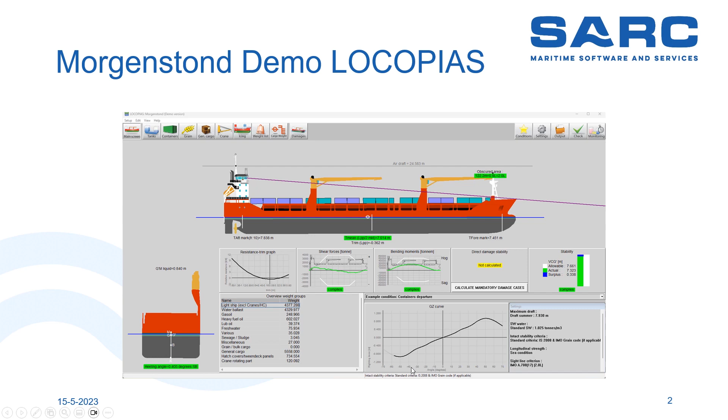So we will switch to the demo version we use the most. It's the Morgenstond vessel.

It's available for all demonstration. Also, if you need to show something to your clients, etc., we have it available for everyone. And also, if you like to test new features, just give us a call, and we have these available for download.

I will go over all the modules and the new features in this LOCOPIAS version, and then at the end I have some other features that are not available in this LOCOPIAS version. But I will firstly go through all the modules in this LOCOPIAS, and I will start with all the loading tools that you see on the top of the screen. Then at the end there are some tricks and features in the main screen, and output, etc.

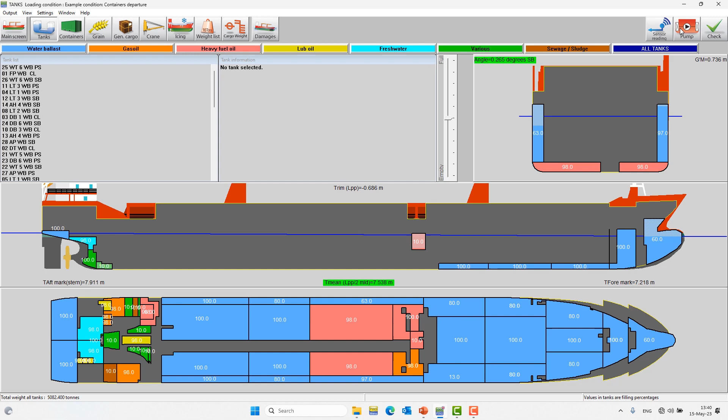So first we have the tank module. It's quite straightforward, mostly. One thing that is quite a topic these days is more interfacing with other packages, and here's a sensor reading button, and it can read data from all other kinds of systems. It's really nice to have that you, as a user, don't have to type all data and have mismatches, etc.

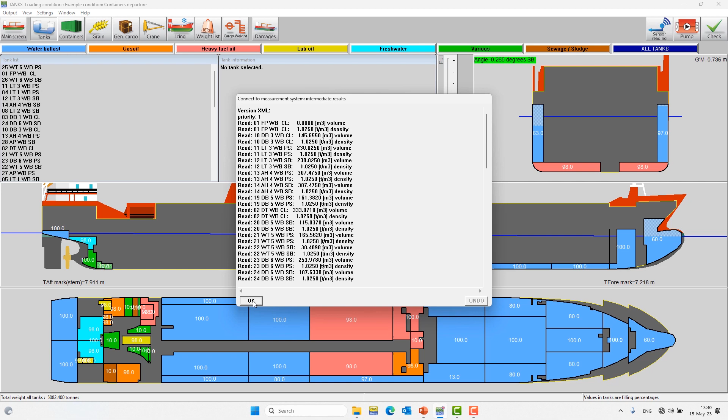So that's quite simple. Big development last year is the new container module. It's completely redesigned from scratch. As Herbert already told, it's a really new way of thinking. Before, we defined the slots where the container could be positioned, and that was really fixed. Now we define the castings on the deck or on the tank top, and the program derives. Perfect.

It's a bit aesthetical. So now the program automatically calculates where the container can be positioned. It checks the geometry, also if a container is extra wide or extra high or longer than standard. It will do all the checks for you, and then it basically has no limits.

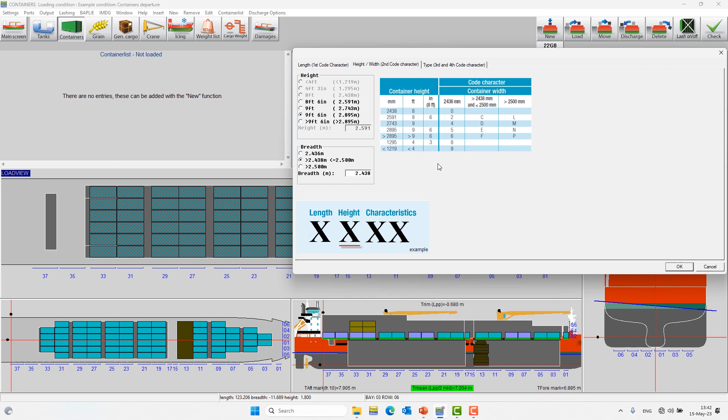You can select any type of container, any length, for example 41 feet, high cube, and then for example extra wide. When I want to load a new container, I'm now below deck, as you can see with the red crosshairs. When I go above deck, you see the yellow positions are available, and I can load some containers here.

I could even say I want to place containers freely. For example, for inland ships, they don't have castings on the deck, so you can just put them anywhere where there are no obstructions. So yeah, this makes it really flexible, and we have some clients, especially we work with A2B, who still have all the weird shapes and containers. Now the program can do anything that is available.

Within the container module, there are some extra tools. First thing I like to mention is the IMDG - so it's the code on dangerous goods, and the software can check if the containers with dangerous goods are separated from each other with the required distance. I already prepared an example, so I will check.

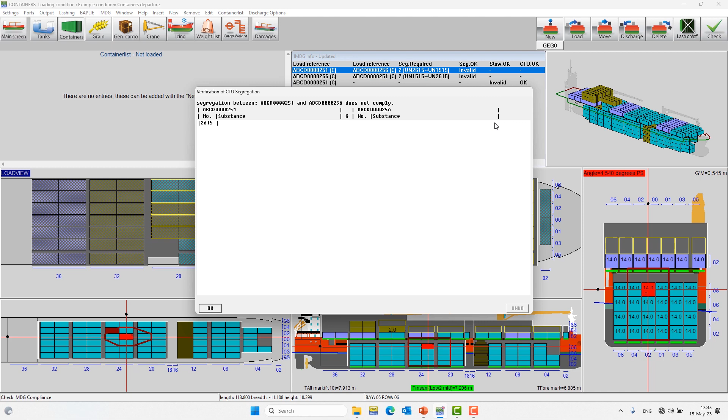And it can be a long list, of course, with all kinds of checks and extra messages. In this case, there are no special messages, but sometimes there is even information that the software can't check, and then the user can read the message. So he would still need to go through the list to see if all is okay, but most will be checked by the software itself.

And then on the area that is forbidden, you see already here that the forward part is a bit shorter than the aft part. I would like to go to my presentation to show how that works.

So in the dangerous IMDG, you have a container, the orange one. It contains the substance, and then there's a standard distance of one 20-feet container forward, aft, and to the sides. And then you check if there are containers inside that area, because if, for example, the container catches fire, then the containers in that area are affected almost immediately.

So, for example, the green container is partially in that area, so then you have to include that container in that zone, and then you connect all the outer points like with the red shape, and that is then the final forbidden area.

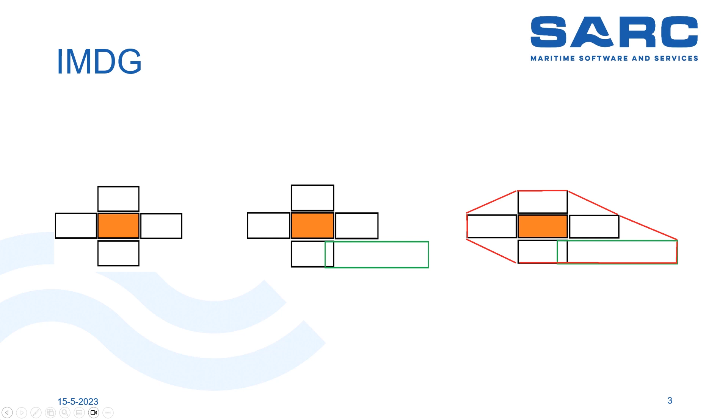Yeah, in the demo version, you can only check substances that end on 5. So you will see in my example as well, it checks 2615 against 1515. So if you want to play around, use substances that end in 5. But as is typical for us, if we pay as well, as an institute, a fee, then we can get full functionality on this demo version.

That's possible, yeah. Any other questions on IMDG? Okay, then I will continue to BAPLIE.

It has also already been explained a bit this morning. It's the industry standard for sending data to ships and to terminals, etc. But it's a bit of a crappy system, yeah, it basically says the container is in bay 12, for example.

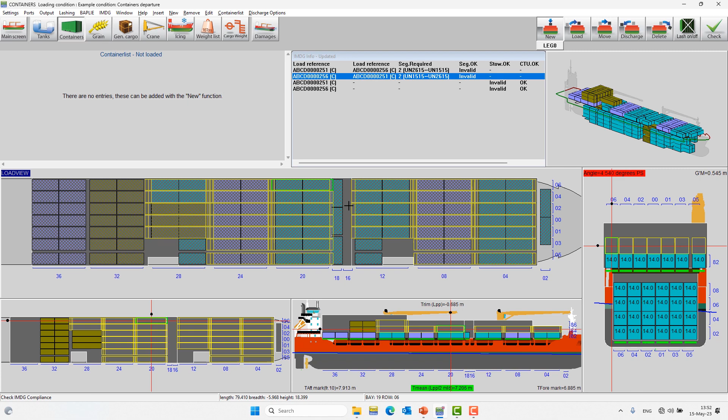But yeah, if you have, for example, a 45-feet container, I can show you. You can already see the option, like the container can have its end sticking out on one side if it's positioned on a 40-feet bay, or on two sides, or on the other side. So it basically has three positions where it can be put in bay 12.

So BAPLIE doesn't say where it needs to be positioned. So we were in discussion with A to B again. A to B helped us a lot with this new development. They are one of the first clients, and that helps to have feedback from the users. And this is one of the issues.

Yeah, we can't help that the industry standard is a bit crappy, but finally we had a solution that the user can say, well, in bay 12 we know every time we want to have these containers sticking out to the front, and then the program knows how to position the container, because it's limited to one anyway. So yeah, we have a bit of a workaround for the BAPLIE system, same as the example in the morning.

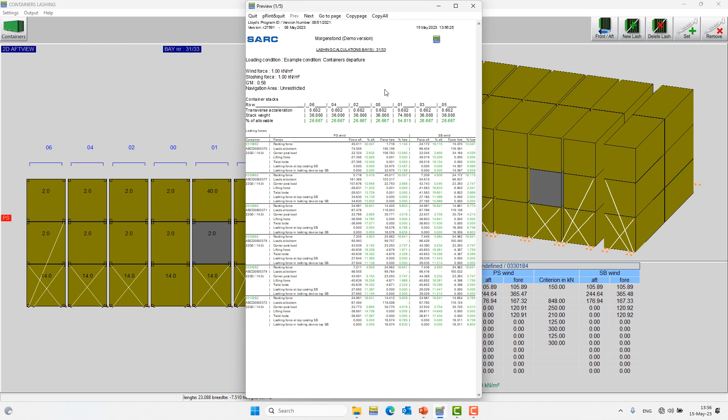If I turn this off again, I can click on the container to see all the calculated values. If I print, well, everything is green. Yeah, it's click and go, basically.

You have to manually apply the lashings in the program for each container, but you can also copy. It's not an advice, no. It's a bit of trial and error.

If the lashing does not comply, it will show either the container in red, or more specifically what part is not complying. So, non-compliant according to the forces on the container. If the lashing is approved by the lashing computer, you can use it as an alternative to your lashing plan. So if your GM is different, for example, you can sail with fewer lashings.

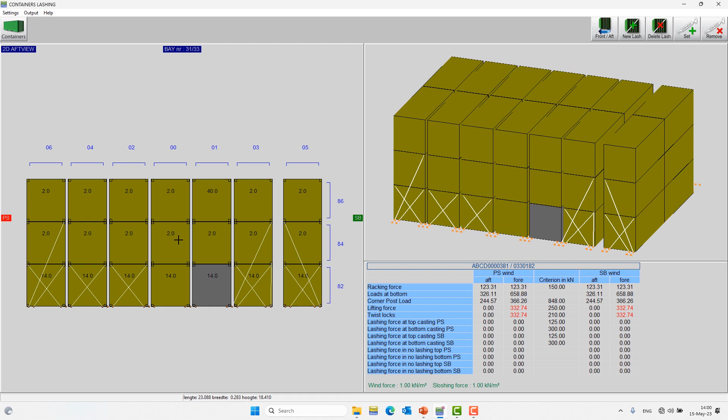Now you have 3 standard containers, but maybe in the model of the ship it's not allowed to put 3 high cubes. Is that a LOCOPIAS warning? No, for the lashings it does not matter, it will just take that stack. If you go back to the container module itself, you see here in this area how much space is defined, and this is the height that is allowed for that ship.

One additional feature that's quite useful for ship owners: you can have either route-specific lashing or weather-specific lashing. On certain routes you can apply lower accelerations, and therefore you need fewer lashings, and the same applies for weather-specific lashing. When you know you have a short trip and the weather is good, you can get an exemption. I don't know the details of how you get the lower acceleration, but you can put the acceleration into the program, and then you can use a smaller amount of lashing rods. That's when the real advantage starts compared to the lashing manual, because that's always worst case.

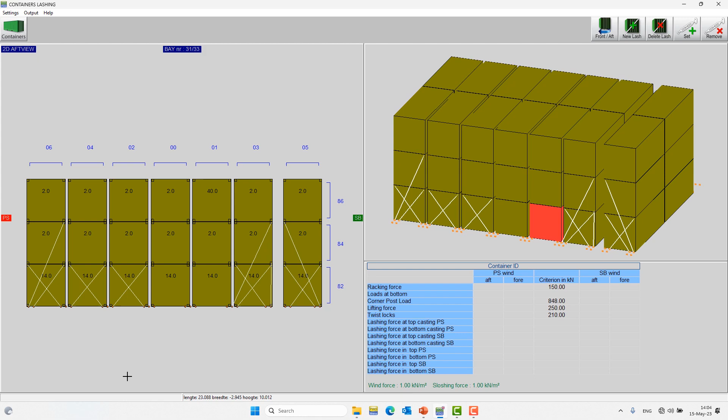Any more questions on lashing or containers in general? And I will continue.

The grain module I will skip, there's not much changed there. I'll go to the general cargo module. I will not show all details, but there's one nice feature I like to show. I'll go to a different loading condition. I want to have an empty ship.

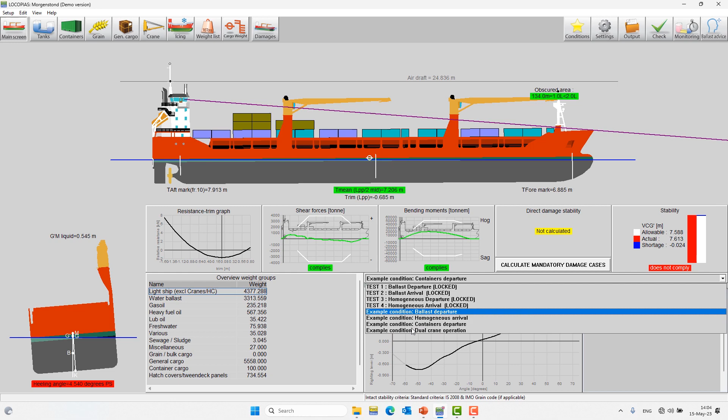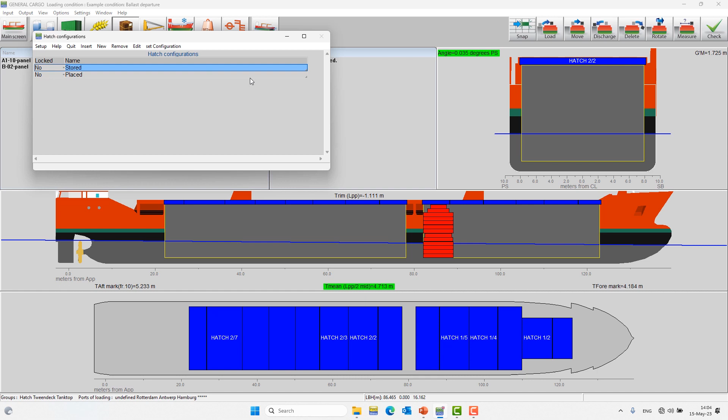You see all the hatch, the tweendeck panels in place, and before you could move them one by one. But now we have a small but handy feature where with one click you can just move all the panels. It's quite simple, but it works well.

You can predefine this yourself? Yeah, the user can set this. So even if it's not really a store position, but they just dump them somewhere in the hold, you can set that as a position and then use it again later.

Also for a different loading condition? Yeah. For example, lately we had a vessel that did not really have a store position for the hatches. Then you can give it to the crew and they can define it themselves and work with it.

You can also manually shift them like you shift the cargo? Yeah, so normally if I take this, it will snap to the predefined positions. But if I turn off the snap, I can just move it, and there's even a predefined height, tank top. Now it's on the tank top.

You want to stack another one, can you also do that automatically, so it stacks on top of the one that's now on the tank top? No, really stacking is not part of the general cargo module.

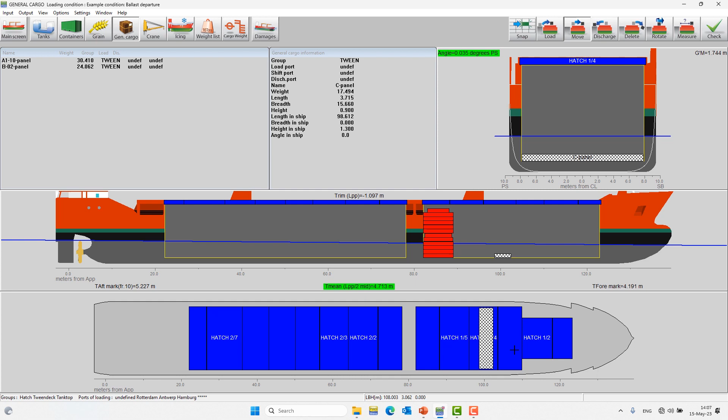The crane module, Marco already told you the definition side has been changed in PIAS. For the user, it's not really changed, it's the same module. One thing developed in the background is we use a different computation library, and it now basically has no limits to the number of elements. Before, the crane could have two moving elements, like a boom and a jib, and now it can have limitless elements.

We may need to define some more buttons in the screen to operate it, or redesign it. But if you have a weird crane, or a flying jib with more moving parts, like we see inland on cranes mounted on trucks, really folding cranes, we now have the tools available for that, so that's new.

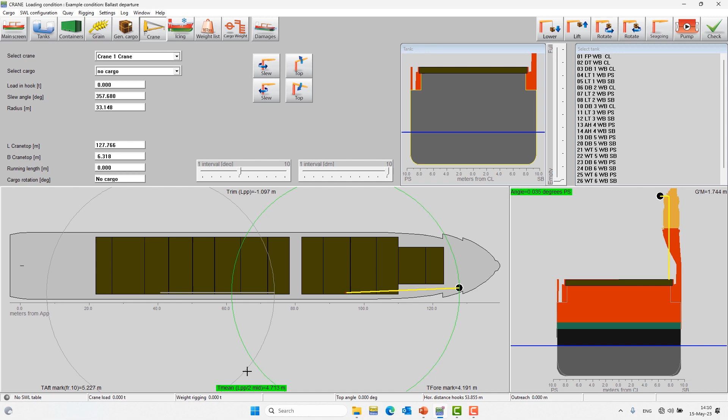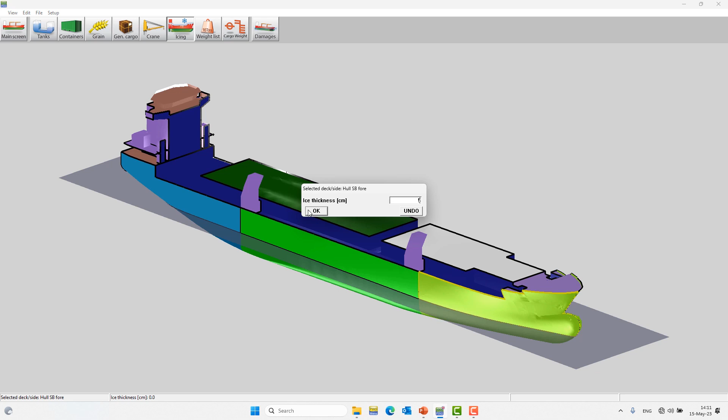Icing module. It has been explained, but I'll show you. Simple click and enter a number, and the same for the side. It will add just weight to the weight list. It's quite straightforward. Below the waterline, it will just cut off the vessel, so it will only be added above the waterline. Simple as that. But then you, as a crew, you don't have to make calculations. How much weight would it be? What would be the center of gravity? It's just more simplified.

This is icing accretion according to polar code, and then we fulfill still our stability calculations. Yeah, but then it's usually weights that are available in the stability booklet, and then we can use just in the weight list, select that weight that has been predefined. That's what most ships use, and then we don't sell this module, and we don't have to make the 3D model. You just put in a weight on the ship, and yeah, if that's okay, it's okay. But if you want to do something different, and you know there's 10 centimeters of ice on deck, is that okay, or do I need to start removing it?

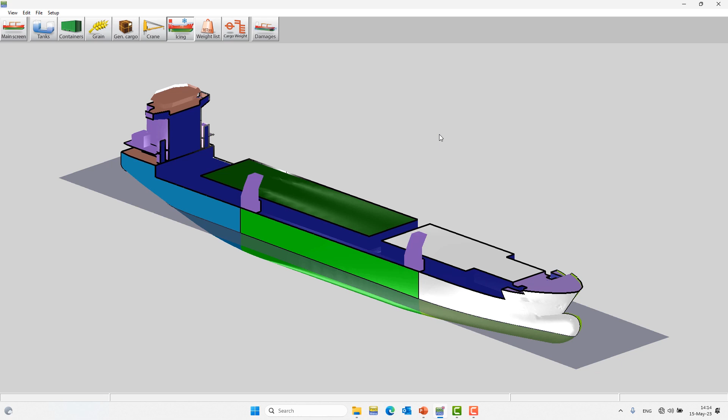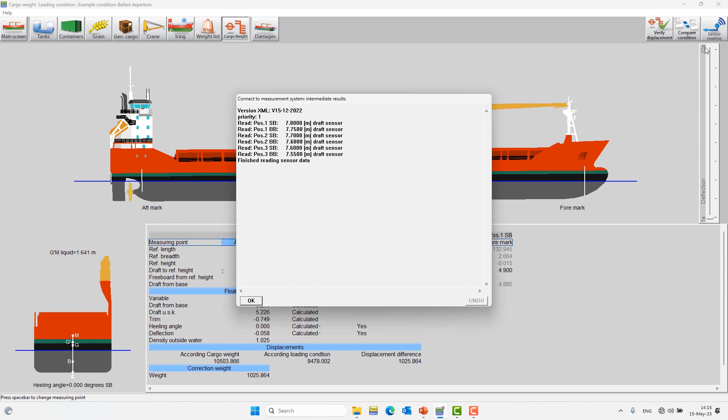The weight list, I'll skip, it's not really new here. The cargo weight module is the module for draft surveys. Yeah, we redesigned it a bit to have more feedback directly on the screen. The lower part gives you more numbers directly when you're entering the drafts. Also, a nice new feature is sensor reading. So after you load your vessel, you can press sensor reading, and it will fill in the measured data from the sensors, and you can check if the planned cargo is the same as the loaded cargo.

Yeah, I will not give a full user training, but these are the developments here. I ask a question as well about... Yeah, you have, I have a lot of questions. We use this tool for loading a ship, and if you go to the page with the overview of the ship, you printed or present the molded draft, because that's what you use for the calculations.

Yeah, here on the... Yeah. What you use as an end user, and you do a draft survey, you do it while loading, you check your drafts, and then you want to put it over here to make a calculation. You start with an empty ship, and you want to see how much load you have already in the ship. Then you see a difference in the draft. And if you are experienced, then you know where it's come from. Is it then not easier for the end user to use only the drafts outside?

The keel marks, on the fore and aft mark, are on the underside keel. It's a bit of an industry standard to have the mean draft as molded draft. So for the shiploader it's molded, but as a user, a mate will only look at the underkeel draft, from underkeel until the draft mark. You can make it as a setting. It's also like in the stability booklet, usually molded draft, and sometimes drafts are mentioned as molded draft.

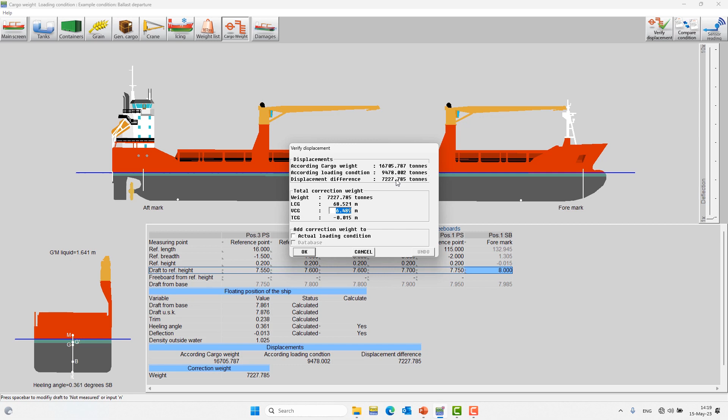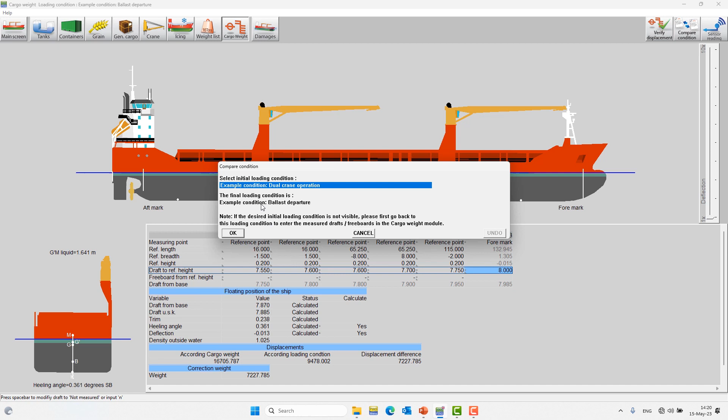Can you print a draft survey report to show? We have two types of reports. One is basically if you want to verify if the planned condition matches the measured condition, so it gives some intermediate results. In this case the difference in displacement is quite large, and it will give you a report. The other one is the real draft survey, where you compare a measurement before and after loading, so you know how much cargo is loaded or discharged. You have to select the previous loading condition, and it will compare the initial loading condition with the final, calculating how much cargo has been loaded in this case.

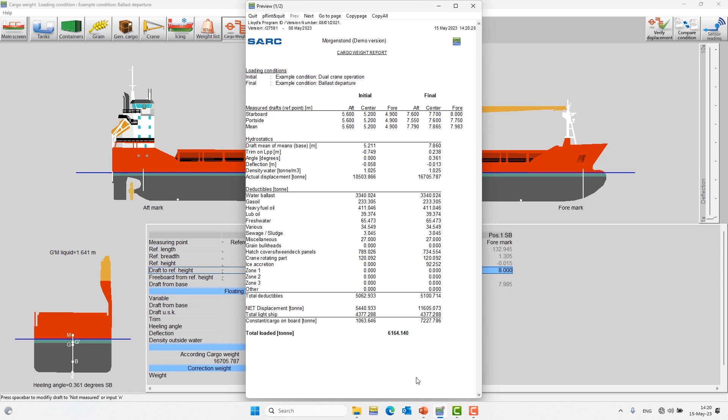There are multiple ways to use this module. Is there a bulk cargo manual available? This vessel, for instance, has 2 compartments, hold 1 and hold 2. Is there any functionality to load bulk cargos? Bulk cargo can be loaded in the grain module, then you can switch to bulk, so the grain moment is not taken into account, but it's the same. You can adjust the density, and that doesn't matter if it's grain or something else.

Can you trim it as well? Normally if you want to load the maximum amount of bulk, you get the heel correct rather than using ballast. Is there anything that lets you shift the TCG a bit to one side? No, so it's always in the center of the boat itself. But yeah, there are some tricks if you'd like to move it a bit - you correct it in the weight list, or with the cargo weight module you measure the actual heel, and add the correction weight to your loading condition. So maybe 5 tons need to go a bit to the side, and it will calculate the position of the weight and also the LCG, TCG.

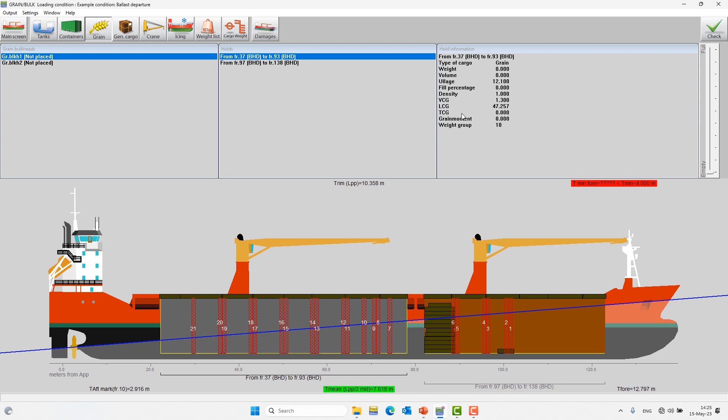Back to the main screen, there are some smaller things I'd like to show and mention. Something we notice with conditions, we also have the option with file import and export, especially for ship owners, since you can install LOCOPIAS on as many computers as you like. You can make a planning in the office and then send it to the ship, and they only have to maybe adjust the fuel levels a bit, and then they can go sailing. That kind of collaboration is freely available, and it's nice to know, I think for all the ship owners, so I'd like to mention that.

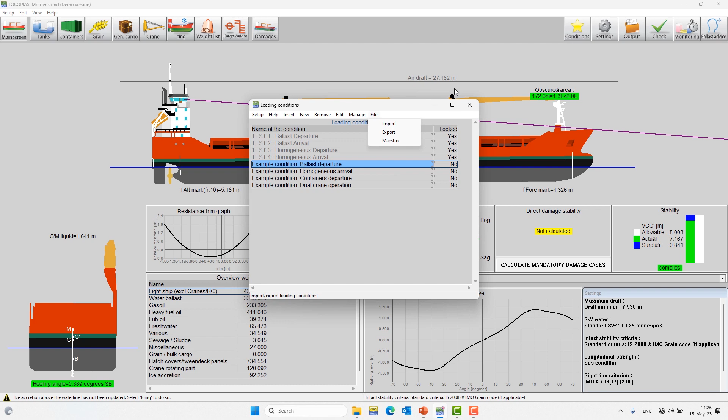So next one is the monitoring feature. I think it's mostly beneficial for tankers, but if you turn it on, you can set an interval, for example 5 seconds, and it can interface with the tank reading system, read the levels in the tanks and make a calculation of what you want. Damage stability might take very long, so it will calculate probably longer than 5 seconds. But in this case it will read the tank levels every 5 seconds and make a stability calculation. So if you're on a tanker doing loading operations or ballast operations, you can check if it's still safe.

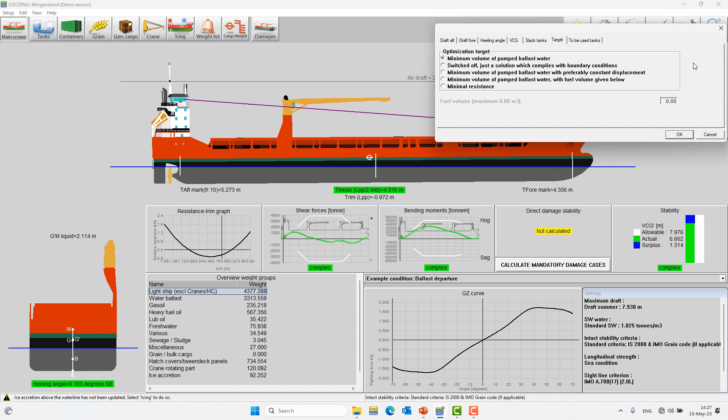Ballast advice was already mentioned. There are a lot of settings you can make. You can set drafts, target values, extreme values - these are the boundary conditions, heeling angles you might want to correct, etc., number of slack tanks that are allowed, and the optimization target that was already asked. Default is minimum pumped water, but you can have other targets, for example minimum resistance. If you have the trim optimization, you can select this as well, and it will find the optimum trim with the least resistance. Then you can select which tanks are to be used.

I will not press OK, because it can take a few minutes and that's a bit boring.

Question regarding the slack tanks: you said you can put in how many slack tanks, but from practice, you never want to have a double bottom slack. So can you make a choice in it, or is it just all the tanks? We as SARC can in the background have more control over this, so we can say these tanks can be slack and these can't be slack, and if you check that box, then all the tanks allowed by us to be slack, these can be slack. But we always have to find a balance between how easy it is for the user - we can make a lot of settings, but then the user will be lost. I once showed a guy who put all double bottom slack to reduce the GM, but that was not a good idea. That was why I asked. Sometimes a small number of slack tanks to increase comfort can help.

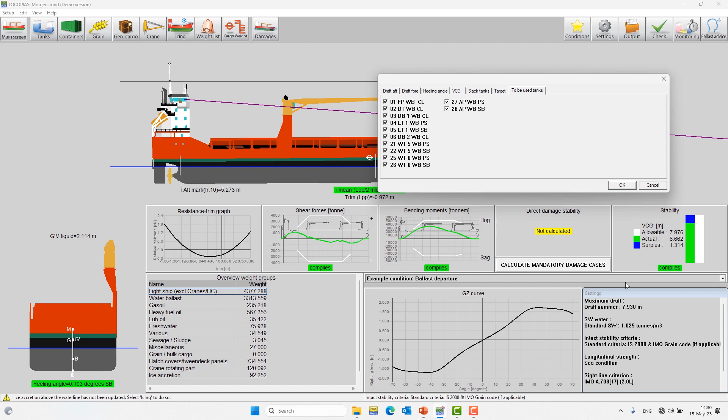So next is the trim optimization. The graph was already explained, but one extra feature I'd like to show: with the scroll bar, you can add a range of displacements, and that helps. Perhaps you would like to put ballast to get a better trim, but then you have a deeper draft, and the graph is not valid anymore. So then you have an idea whether it will benefit your vessel to put ballast.

How is that optimal trim defined? Is it a default setting or a user manual input? There is a table behind it, and there can be different sources. Quite standard is the CFD calculations - these are quite expensive and long-running calculations, and you need quite a database with different speeds, different trims, different drafts. So yeah, it will quickly explode.

CFD is quite normal. Otherwise, EFD, experimental fluid dynamics, so towing tank tests, or real life measurements is also a possibility. But yeah, we need to have data, and that's the problem mostly why this is not used so often, because getting reliable data with enough data points, that's difficult or expensive.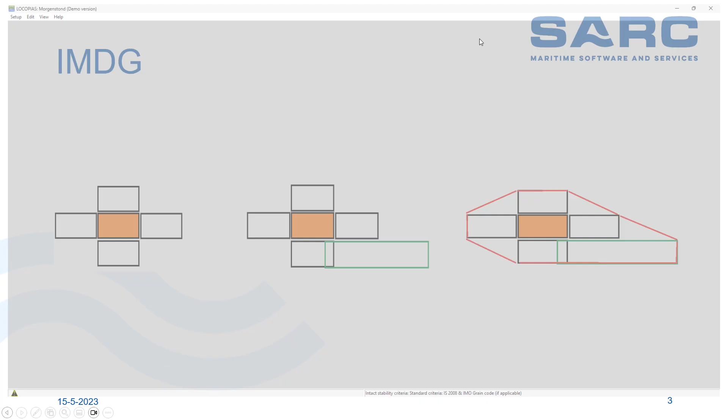I think I'm done here. We'll go back to my presentation. There's a small number of other things I'd like to show.

One is damage control, also known as type 4 software. So you have a damage and you like to know what you can do to rescue the vessel. You define the damage case, you define internal water, maybe there's some firefighting water or a broken pipe, so you have internal flooding. You can define fluids in all compartments, not only in the tanks. Then you press calculate, and the program gives a list of solutions.

It will give one tank at a time, so one action, fill this tank or empty that one, and then the user can pick from that list. It is sorted by what gives the best solution, but maybe that solution isn't achievable, the pump is broken or really slow, so maybe the user wants to pick the second or third option.

And then you see the result, and you might iterate and improve the stability even more. But already the first action can be put into motion. So the user is still in control, but the thinking can be done by the computer.

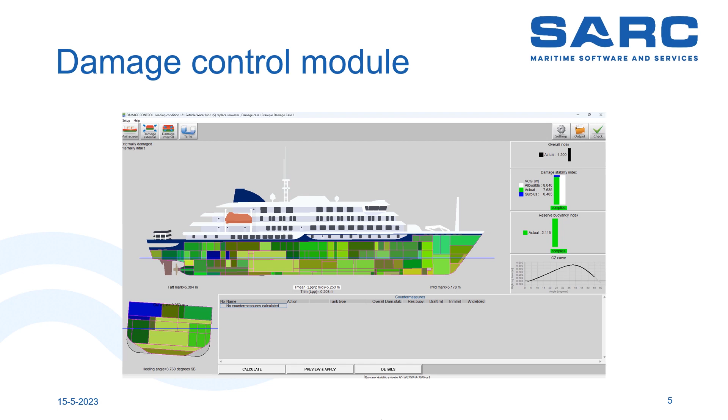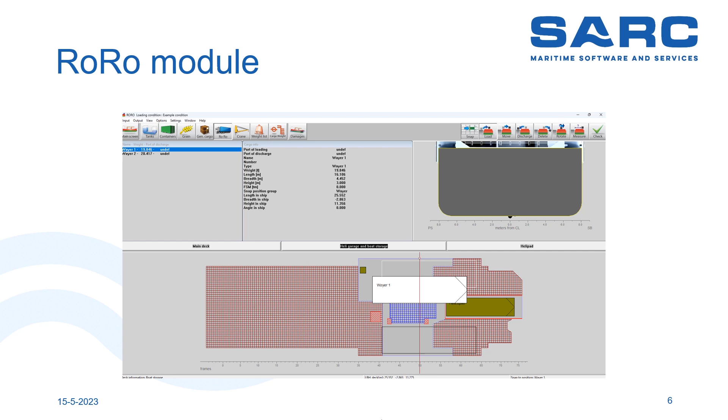A small feature in the RoRo module is snapping cargo. If you have these defined, you can just drag and drop, and it will snap to the predefined locations, so you don't have to move it very precisely. If you have a lot of projects with fixed positions, this is quite nice.

It was already explained in the morning, but we integrated the sounding module into loading. So now in the weight list, the user can make all kinds of corrections, temperature corrections, or enter the measured soundings with a certain trim. This is mostly useful for tankers with heated products.

For these kinds of ships, we can also make use of external tables. These ships usually have official tank tables. Normally LOCOPIAS makes use of its own geometry, but there can be small differences with the official tables. So you can also use these tables in LOCOPIAS, so you don't have the small differences.

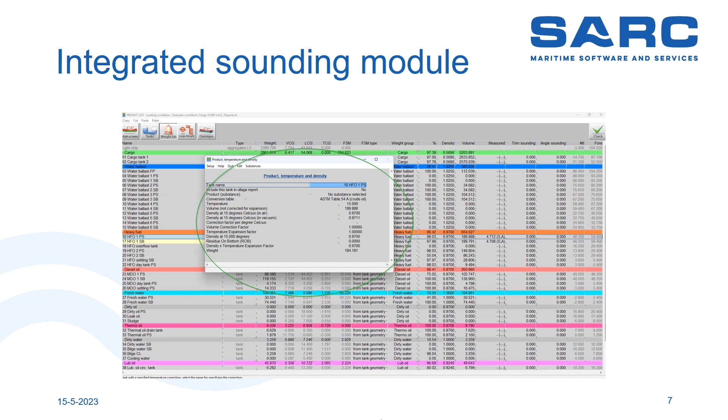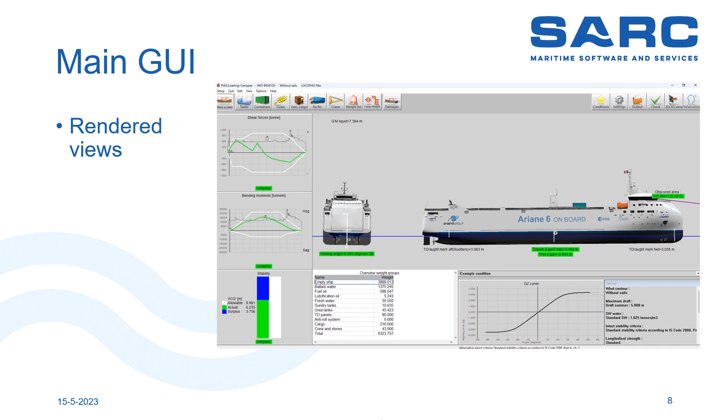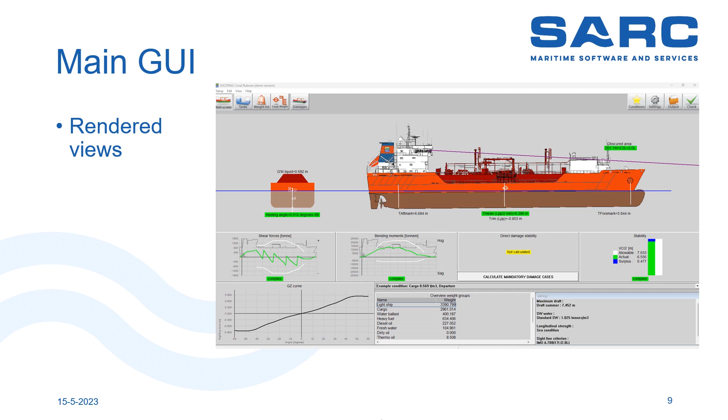We also changed the main GUI a bit. We can now make use of just pictures, BMP files, so any rendered graphic of the ship can be included, which improves the main GUI quite a bit. This is an example, and this is a more simple example, just a colored general arrangement plan, but still the level of detail is much higher than we had before. It makes the main GUI a bit more appealing.

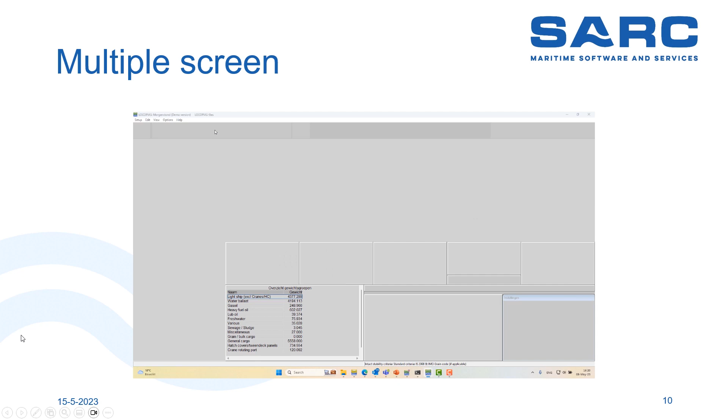We are working on an option so that you can have multiple screens open at the same time. I'll show you: in this case the general cargo module is opened. I'll put it to the side, and then the tank module is also opened. If you play with the filling of the tank, you see it in the other module as well. This is quite straightforward, but it can be quite nice, especially if you work with cranes and want to make ballast adjustments, etc.

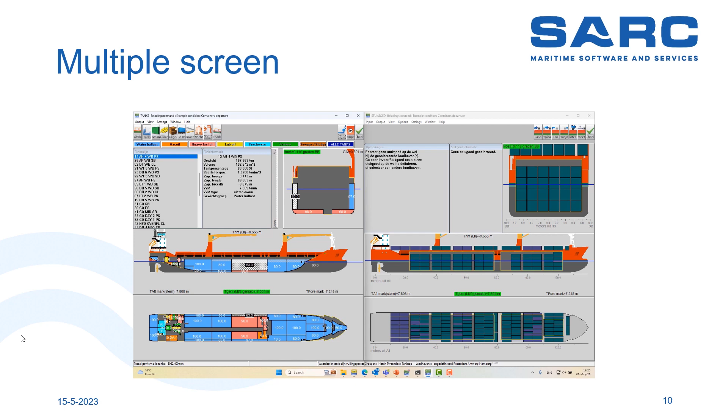Now we have a small, simple version of the tank module inside the crane module, but that will be stripped out. So you'll have just a crane module and a tank module, with all the functionalities and not a limited version, giving you full control again. This is in development, but if you need it, we can maybe speed it up.

The license mechanism was already explained by Mark, but it's good to tell you again. The software now has all the functionality, and the license file says what you can do. So we can easily update the license file and add functionality to your software without having to reapprove.

The stability is calculated correctly, and you want to maybe add the draft survey module that has nothing to do with the approval, so we can just turn it on without making a new installation with a new version number. That gives the possibility to turn on features without time consuming and expensive approvals.

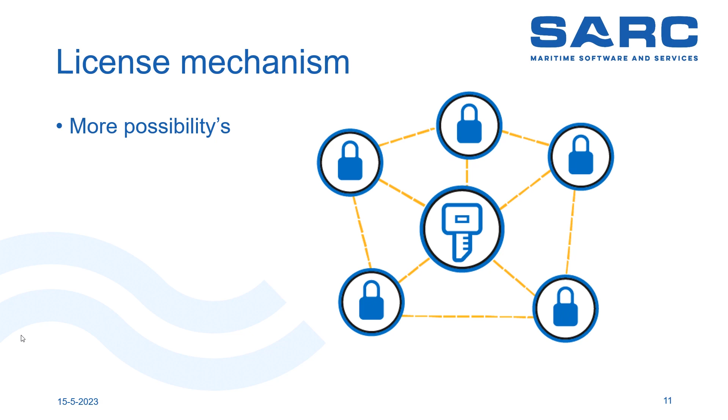I'd like to remind again that we can make project specific functions. A lot of clients have specific needs. Then it's nice if they come to us and say we would like this feature. And then we design something and we can program it.

So for example, this vessel has some features. It's a cable laying vessel. The tower can be moved. It has a specific setting. You can see in the top some extra buttons that are not standard. So the tower can be moved. It has a specific function for the winch.

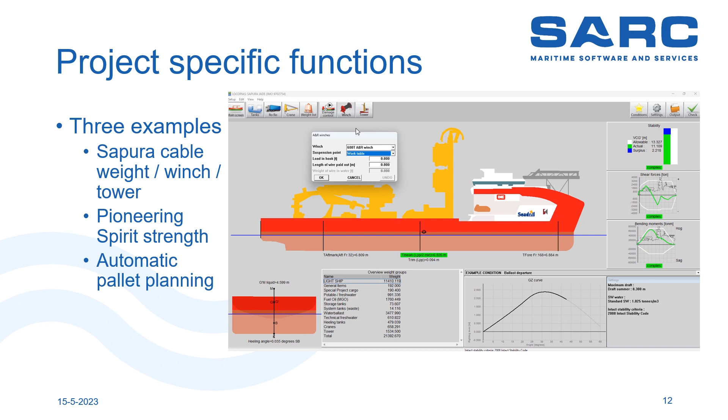Also if the weight from the winch can be moved via the crane into the water. But if it's a deep sea construction site, then there's so much weight in the water that even the buoyancy of the cable can have an effect on the weight in the crane. So that can be corrected there. This kind of thing is normally not an issue, but this was also a specific project.

I highlighted that there's the torsion. It has 2 hulls in the front, so we have two times longitudinal strength. There were some other things, but just an example.

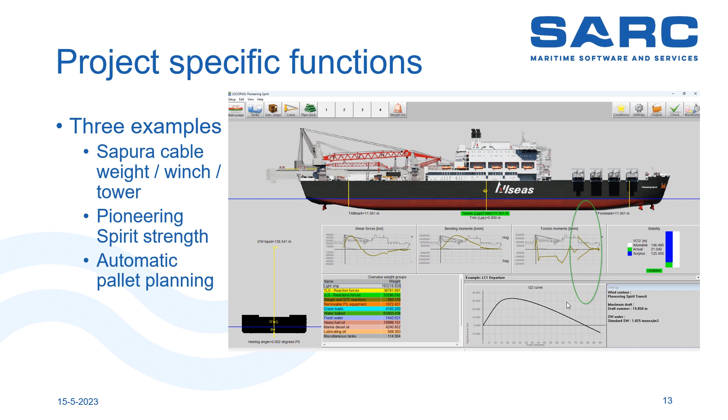And this is a project that needs to be programmed. There's a client who wants an automated loading tool. So you select an area like in the top, and it will optimize the pallets that can be loaded in that area, so you don't have to puzzle yourself. These are just some examples. Come to us if you need something.

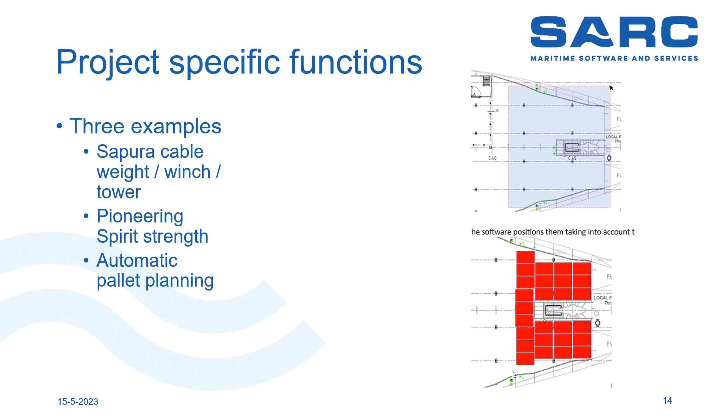Interfacing was already discussed a bit. Tank reading, we have a lot of experience in this area. There are a lot of interfacing standards. It's sometimes a bit of a puzzle, but we usually get there to connect the systems. Like I mentioned, the crane angles can be read.

We have recently had, with ST shipping technology projects, a second instance of LOCOPIAS running all the time, reading the tank data. It's a tanker, so the cargo can also be measured with tank reading, and then the system is continuously checking the cargo and stability of the vessel, and sends it to shipping technology, and they gather all the data from the ship.

So we are now also discussing with them to have a similar system, but for general cargo, so you can't measure the cargo directly. There needs to be a solution on that end. But that's a topic these days - you want to monitor and gather data. We have a lot of data, and ways to get that from LOCOPIAS to other parties and vice versa.

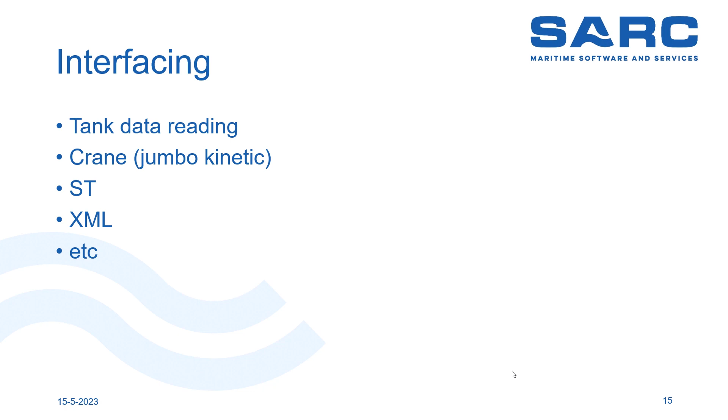How much time do I have left? 15 minutes, right?

So at the end, a few tips and tricks. We notice sometimes we get questions about test conditions. The user needs to verify if the software is working properly. It's a bit of a silly manual process - the user just gets the booklet and compares the numbers with LOCOPIAS.

And then sometimes surveyors from Port State or similar say, make some adjustments or make these loading conditions yourself, and then see if it still gives you the right conditions. So not only printing the predefined test conditions, but making some adjustments and then checking it again.

And then sometimes we have differences. It often happens that users just fill in a tank percentage, for example 90%, and then the weight is slightly off because originally there was 5,000 tons entered and it's 90.05%. If you enter 90%, you get a slightly different weight. These are such silly differences that occur. So our advice is to just enter the weight, because it has more digits in the booklet compared to the filling percentage.

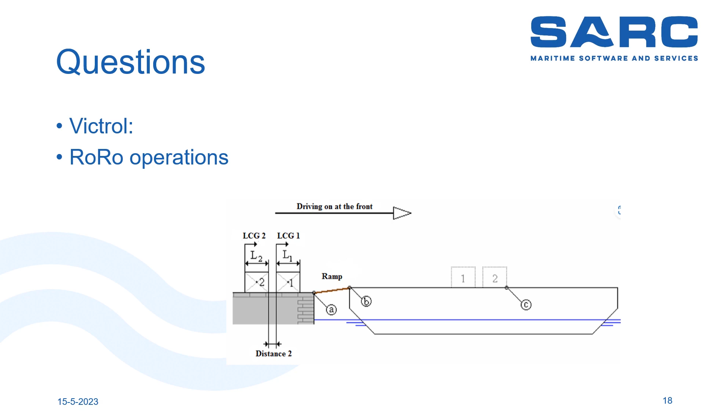The other question came from Big Lift, about the latest on heavy lift things. I already explained a bit about this. One addition - we programmed for some client an option to position stabilizing pontoons at different positions and different heights, which is quite handy for these vessels. I don't know who is from Big Lift, but hopefully this is a bit clearer what is available and what is the latest.

We've been using this for a few vessels now, but currently only one left, and normally we use our tweendeck panels on the side as wooden pontoons. But I think the principle can be the same, it's just a little different.

It would be easy if in the hatch configuration you could also click a button and say I want to use this panel on the side, but that's something that should be developed. If you have the hatch covers, in the hatch module you can say you have it, well, it's not on the ship, but we can probably make an extra line to put it on the side. I don't think that will be very expensive to make the button there.

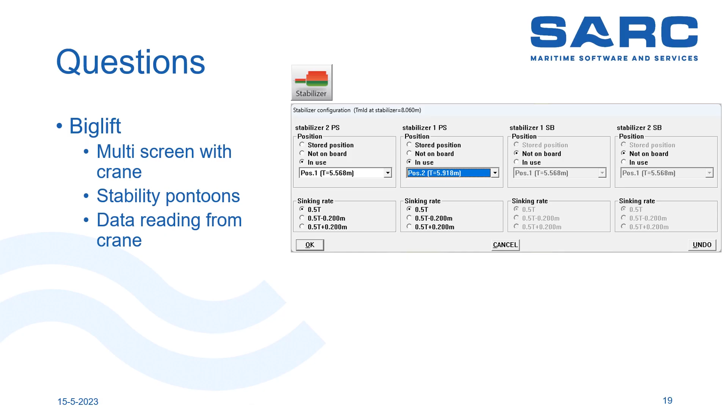I closed my demo version.

So often you would print it to a preview page, and then you can send it wherever you like. With copy, I have rich text, which is formatted with pictures, for Word. You have plain text and tab text, for Excel. So you can copy it wherever you want, or you can print and quit and print it to a PDF printer.

Have you ever done what we currently use in the office, Word files with a header and footer, including some fields which are filled in later from our network? Did you do that before, that you have the output from PIAS going into a template like Word format, which already includes a predefined header and footer? I don't think we have that available at the moment. No.

But you can just copy paste it and put it in that template, and that's of course a solution, but it takes extra steps. So our preference would be that somehow PIAS can have the report directly printed into that specific template, but that's something up for development maybe.

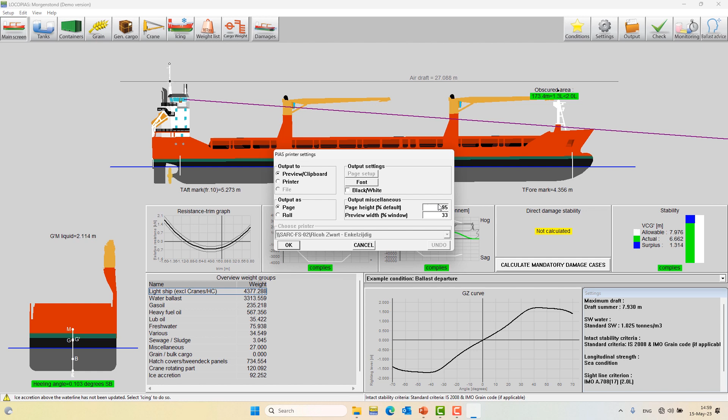Yeah, you can also set it just like with printer settings. You can set, for example, set it to 80%, and then look here, you have some free space now. So it's not using the full height of the page. You can use that and just work with trial and error - maybe for you it's 90% or whatever, but you can use this option.

Any more questions? I have a question on damage stability. Is there a possibility to define a compartment permeability that depends on the loading condition? For example, we would use that for stores, where if you have a loading condition where the stores are full, then the permeability of the compartment of the stores is lower than when the stores are empty.

Also an issue in normal PIAS. You have to manually adjust. In PIAS you can have a user-defined permeability for certain compartments. Normally for long cargoes or cargo holds, you already have different permeability depending on the filling.

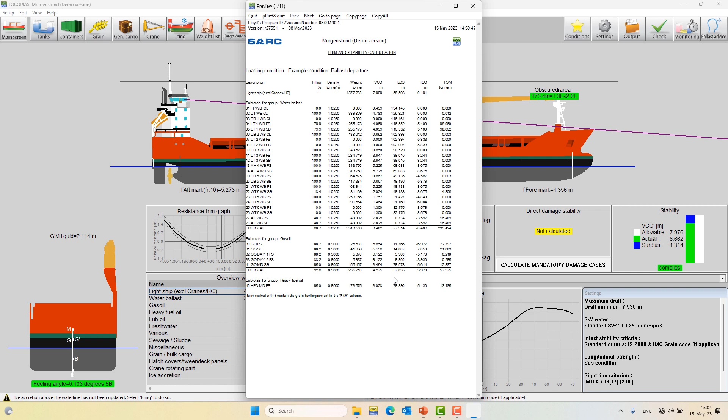Yeah, about the container module. The program uses the official codes for the different types of containers. Your colleague mentioned during the first presentation this morning that there is also a possibility to translate the client's codes into the official codes. Is that already available? Yes, you have the container code conversions. It's part of the BAPLIE container code conversions, and then you can have a line and.

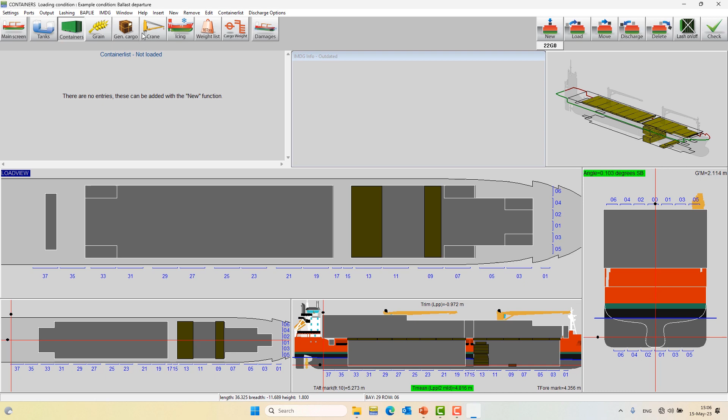I have one more question. Before we saw the tweendeck, it was placed onto one of these modules, and you could move them. Is it possible to do so with project cargo or general cargo? So like when you put it inside of the weight module, you also make an object that you can move inside of a tank module or something else.

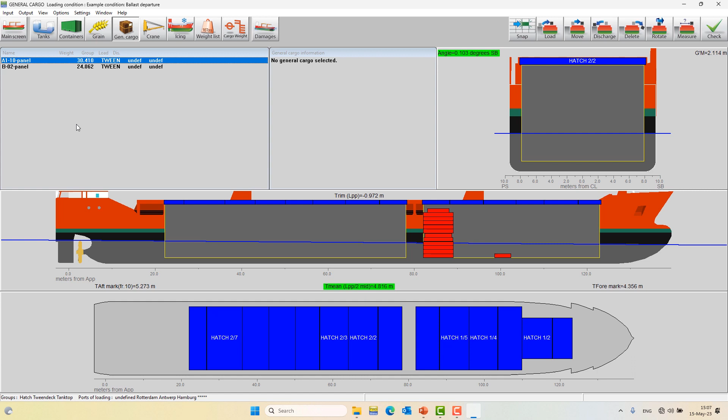Well, at the moment, a cargo item that has been defined in one module needs to be used in that module. We are working on integrating that more. But currently, when I define a general cargo item, I can only move and position it within the general cargo module. You will see cargo from other modules though - for example, if I go back to the container loading condition and then go to general cargo, you will see all the containers, so you know if there's space available, etc. But you cannot move the container here.

Maybe I'm missing this display because I have the module with tanks, the ballast tanks, but not this module with general cargo. Maybe that's a problem. I just have a weight check list and a tank list, but I don't have this screen. So this looks like the tank module, but it's still the same. It's a different module, but in that you have graphical feedback, which can be quite convenient.